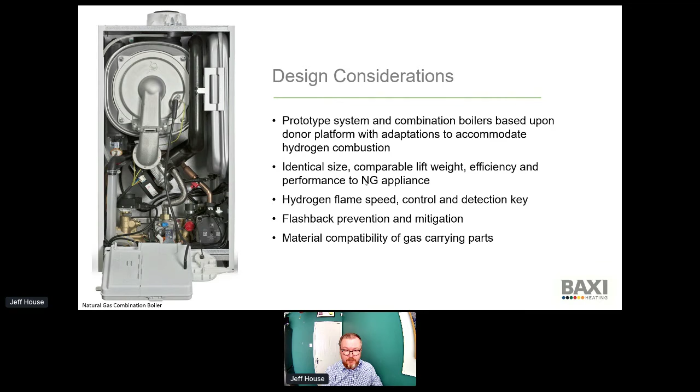One thing we're asked a lot about of late is NOx. So there's a bit of a misnomer doing the rounds that burning hydrogen will automatically lead to a higher prevalence of oxides in the combustion. When we look at the appliances that we've developed, that's absolutely not the case. We have to look at the mix of air and fuel going into the supply and do some smart things around the control of that in order to deal with things like flame control. Almost as a byproduct, that has resulted in really low NOx emission. It's actually lower than our current best condensing boiler, so really good output there.

Again, almost a secondary benefit, we've found that because there's no carbon in the fuel, so the first priority is all about net zero and climate change, but because there's no carbon, there's no possibility for production of carbon monoxide. So although a really secondary benefit, it is a positive safety benefit nonetheless.

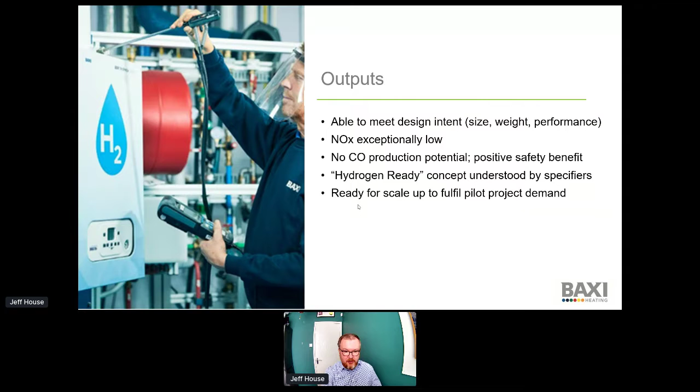Hydrogen ready is something we'll come on to in a second, but hydrogen ready, we believe, will be a really good stepping stone and enabling step for a big chunk of the housing stock. And we're in a position now where we've effectively got a good prototype out in the field. We've got some run hours on it, and we're really ready to start commercialization or pilot project demand. So there are some larger scale projects in the offing, which you'll have seen in the press. So things like H100, for example, with SGN, another project in the mix.

So hydrogen ready then. Again, is something that's probably a really, really important point this year. I'm expecting to see some kind of consultation from government on the potential role for hydrogen ready appliances. So if we look at today's natural gas boiler, because of the work that's happened at HyDeploy, we're fully confident that our natural gas products can operate on a 20% blend by volume of hydrogen, and that's something that's proven anyway as part of the current certification program. So that's a given. 20% can happen quite happily from a technical point of view behind the meter.

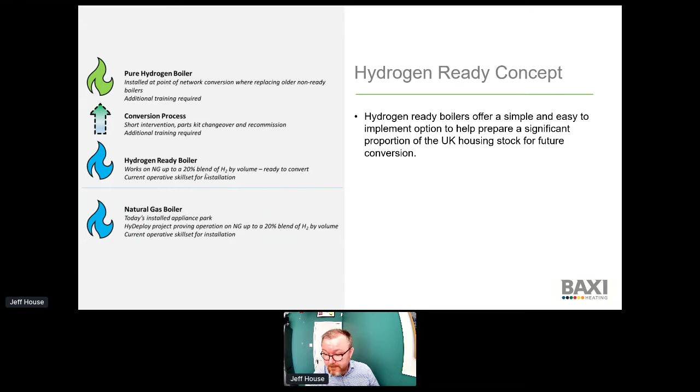So the idea is a hydrogen ready boiler is a boiler that works on natural gas out of the box. Therefore, it can work on up to 20% hydrogen out of the box as well. But some of the internal componentry is ready to be converted to hydrogen in the future, or is future-proof. It can be installed by the current operative skill set. So that's going to be today's Gas Safe registered engineers.

So then at the point of a conversion to pure hydrogen, be it a given city or regional area, so for example, Leeds is one that comes up quite often, it's going to be the case there'll be a mix of products there. So there might be some legacy gas products that would have to be replaced. So we've got a pure hydrogen boiler ready for that. It could be the case that a hydrogen ready boiler has been installed, in which case we've got a really simple and easy low impact conversion process. So it literally is less than an hour, change of a couple of small parts, recommission the boiler, and off it goes.

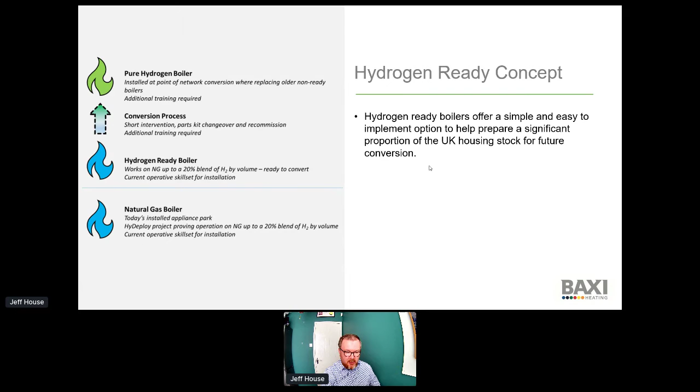So we really think that for the 1.6 million plus gas boilers that are sold in the UK each year, if there's a mandate there to have those hydrogen ready by a certain date, we can really pre-populate a big chunk of the housing stock and make a big inroad towards a future conversion in terms of making it more readily addressable.

And then across different market footprints where we operate as BDR Thermea Group, we've got what's believed to be the world's first live installation of a domestic hydrogen boiler in Rozenburg. That's been a great success. Nice little project in Lochem where we've got a partnership with a local housing association. So there's a dozen homes there unoccupied that have been fitted out with full hydrogen appliances, looking at safety testing and all of the performance stuff you'd expect there. Apeldoorn, near our group HQ, there's a training centre that we've done in partnership with Kiwa, which is opening fairly shortly.

Thank you. Yeah, I shall try and share my slides, and please do let me know if they pop up on screen. There they are. Yep, carry on. Perfect. Okay, I'm going to do it the old-fashioned way just to avoid any more technical challenges.

So yeah, thanks. Virtual Trial Hole Assistant was led by operations. It was an interesting innovation that was based on some challenge statements work we did. We went out to operations and discussed what was the most frequent challenges they was experiencing in conjunction with the work we was delivering as part of our GDSP contract with Cadent across east of England and London. This will most certainly be carried on into our new arrangement with Cadent through the CMO, or Contract Management Organisation, on the London network. So very much a collaborative project.

The challenge was that around 10% of our works each year was aborted, deferred or delayed, primarily because of the asset records - they wasn't reflecting truly what our guys were finding on site, and that's probably no surprise to anyone that's worked in the operational environment. That had a massive impact on our resource and planning. At the same time, we was getting our key stakeholders, the local authorities - there's actually 40 of them across the London network alone - saying we've got to be more proactive, we've got to plan better and not just react to the environment in which we're working. Getting that planning piece right is becoming increasingly more of a focus alongside some of the technical challenges we had.

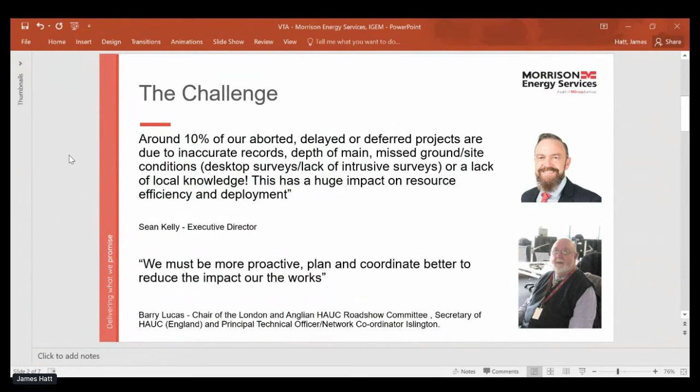So we was looking for something that was lightweight in terms of investment, something that Morrison Energy Services could just do - so it was a self-funded innovation. We wanted something that truly reflected the challenge that we was getting back through the operational teams.

So we partnered with a company called One Network. You may recognise One Network - they was formerly ELGIN, which was the Electronic Local Government Information Network. They process all of the permit and noticing data, which is the information that we have to give to the local authorities to get consent to start works in the highway, and they manage this Google Map style interface you're seeing on the screen now. So what we did is we simply took the map of all Cadent's assets in the form of an Esri shapefile, that's the platform they use, and we overlaid it onto this Google Map style template.

We picked a very strategic area: Southend-on-Sea, which happens to be where I live, and also where John Scrivener, the design manager for the London network, lives. This gave us an area we truly understood because we lived there, and also the opportunity to pop out and validate what we believe this product could do.

The idea of this product is that once we've overlaid the Esri shapefile onto the Google Style Maps template, each time a third party or statutory undertaker, in this case electricity, power and water companies, dig on top of an asset we've yet to replace, we can physically interact with that company and go out on site to look down that excavation, validating our assets, depth, location, and so forth.

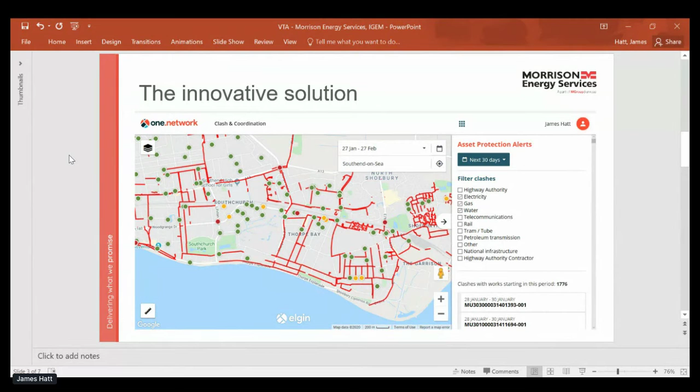Those little dots you can see on this map represent other parties' notices and permits. So what does that actually look like in operations?

So we're getting this type of evidence, which informs our DR4 process, our variations to plan process. It also helps us plan far more accurately, because the traffic management requirements and permit requirements are very specific now. It's really helped us be more focused in our planning, and will continue to do so in the London network going forward.

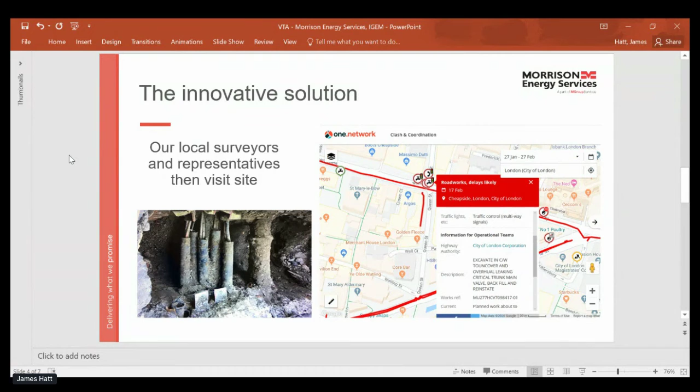You can imagine the cost of a trial hole now, when you factor in traffic management costs, permit costs, and the time negotiating with local authorities. Each one of these gives us an opportunity to see our asset ahead of our works, and potentially avoid some more invasive surveying work. It just pays dividends - it's been a fabulous solution.

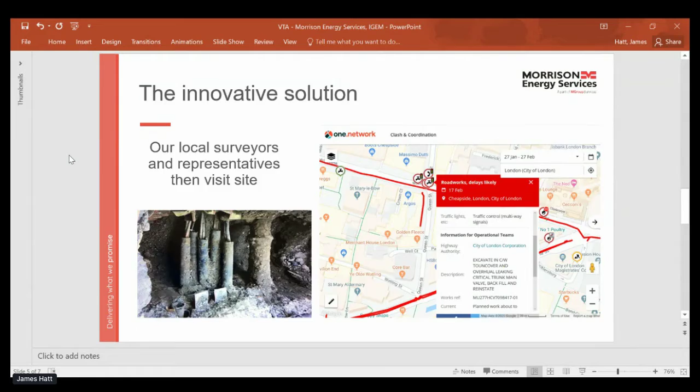What I would say as well is that we've also used it in some of the planning applications. As part of my role in Morrison Energy Services, I've been mobilizing the CMO arrangement with Cadent for GD2, which is the latest contract with those guys.

What we've noticed is that even in the planning process, this product, this platform, has helped us identify where there's been Section 58s, which would have precluded our work being planned, and which are not always visible immediately through the local authority, but also where there's existing works. Sometimes our colleagues working in emergency response and repair across gas, water and power don't have the luxury to collaborate and share insight with us about where they're going to be working in advance, because of course it's reactive by nature.

So this platform serves that information up to us in real time. We can go out and utilise those excavations, as well as those that are in a planned and controlled way through the normal process.

The scale of the opportunity here is huge, and to filter that down we've developed a platform with a screen view. So if you're a project manager responsible for the borough of Southend-on-Sea, for example, you can select to only view what's going on in your borough. In terms of prioritising how you optimise the opportunity, it makes it so much more focused, with massive environmental benefits from reduced excavation.

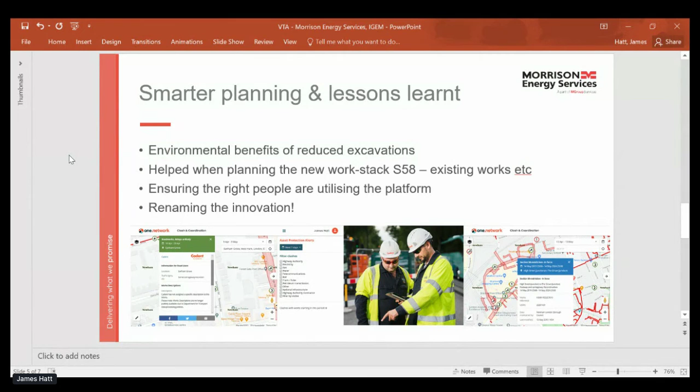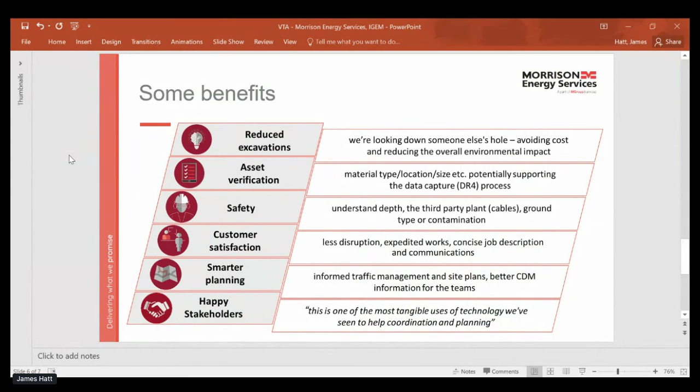I was in a meeting with the Greater London Authority this week, and through this platform in real time I was able to look at what was going on with some works associated with HS2 and some of our other contracts. It's incredibly powerful. So that wraps me up - hopefully I've made good time there for everyone's benefit. And if there are any questions, please let me know.

That's great, thank you very much indeed, James. That's very interesting - I've got a question for you to start it off, and if anyone else has, please post away. You said about the One Dot Network where it highlights where other companies are digging, and that could be on top of your plant. But when you get there, how accurate is that in terms of being dead on the plant? If it's missing by 3 or 4 feet or a meter or two, you're not going to get the information you want - is that an issue?

It can be an issue. I think the focus is again looking at the information in those pop-ups, because what we have to populate in the permits now is incredibly accurate. For example, we have to say what side of the road we're working, outside number 1 to 68 for example, so we can determine whether where they're excavating is on the right side of the road. And of course for some of the major works, as we identified in that Thames Water job earlier in the city, they were crossing the entire carriageway with a 3-metre wide excavation for the works on that trunk main.

They had every conceivable asset exposed in that area. So yes, there are some challenges, but again, it's about that little bit of work, a little bit of almost pre-enabling, using the platform to its full scope, prioritising it and making the most of the opportunity where you feel there is the most risk. So for example, if it's an excavation on TfL's network, where permitting and noticing and trying to get road space is incredibly challenging, this is where this type of thing pays dividends.